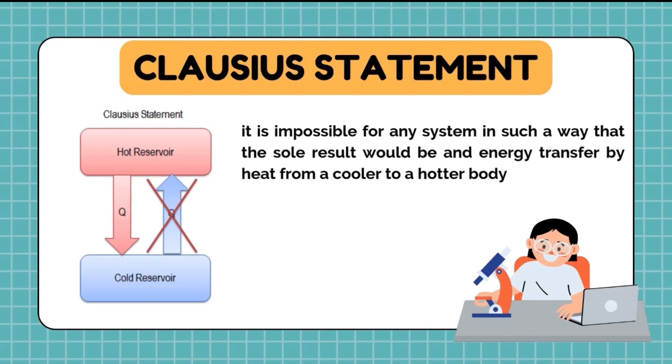First, the Clausius statement. It is impossible for any system to operate in such a way that the sole result would be an energy transfer by heat from a cooler to a hotter body. Second is the Kelvin-Planck statement. It is impossible for any system to operate in a thermodynamic cycle and deliver a net amount of energy by work to its surroundings while receiving energy by heat transfer from a single reservoir.

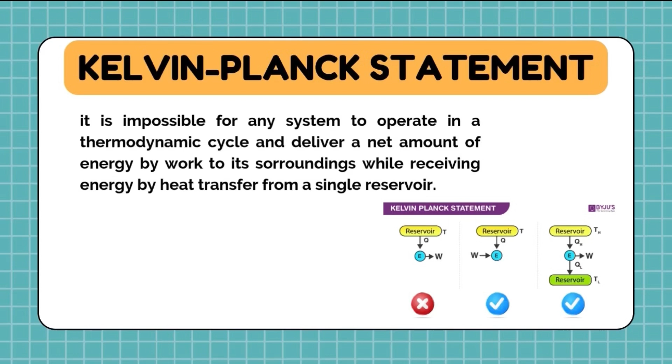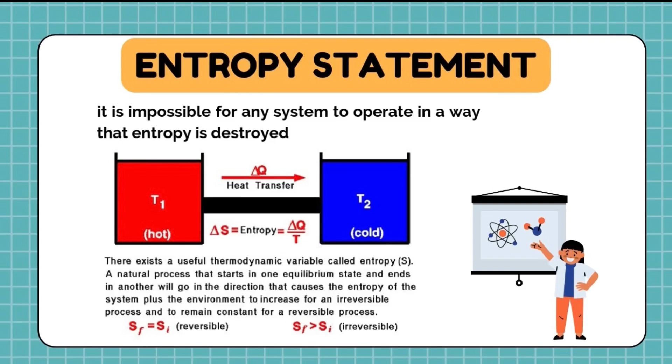The third statement is the entropy statement. It is impossible for any system to operate in a way that entropy is destroyed. So to make it easier, we make two easier statements that would help us more in understanding this law. So first, let's call this high to low. For any process, a natural flow will always be from higher energy value to lower energy value.

For example, coffee: the temperature of coffee is higher than its cup. And as it says, from higher energy value, the heat of the coffee gets transferred to the cup, which is cooler, lower energy value. And that's why the cup gets hotter.

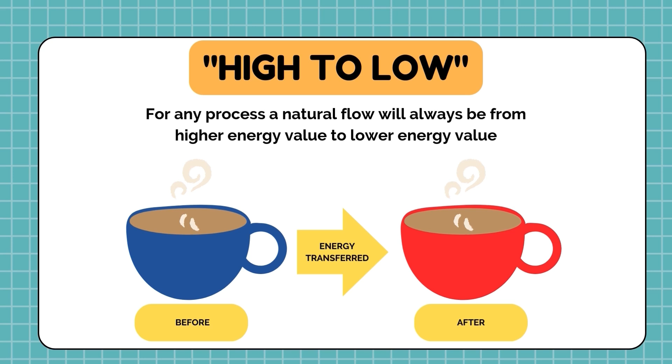So now, let's move to the second one. Let's call this perfect is impossible. For every real world process, there will always be losses. That means you cannot convert all of your car fuel into mechanical energy which can rotate your car wheel. Proof is the gases you see from the car muffler.

Or try bouncing a ball by throwing it up into the air. See that as the number of bounces increases, the height of the bounce decreases because of the loss of energy which is transferred to the ground. So that's it. I hope this made it easier for you. Before we jump to the next subtopic, I would like to note that the second law of thermodynamics is a law and it is applicable to everything in our world.

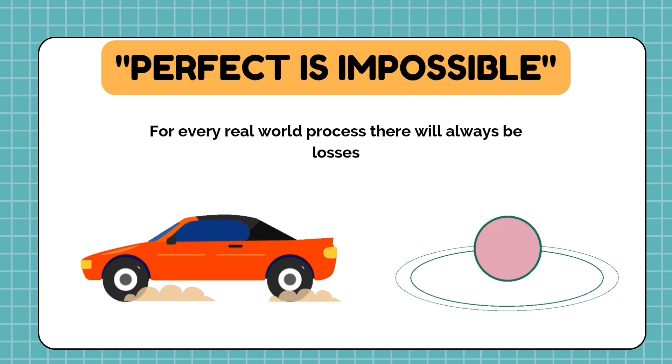So next, I will explain to you guys about thermal energy reservoirs. Thermal energy reservoir? What is it? Well, a thermal energy reservoir is simply a humongous mass, and so it can store a whole bunch of thermal energy. Because remember, thermal energy capacity is equal to mass times specific heat. So when we talk about a reservoir, we talk about something that can absorb a bunch of energy and still not change in temperature. Like, think about the ocean.

If I pour my hot coffee in the ocean, it's not going to change temperature. Well, if it does, it's going to be so small that I won't even be able to see it. It will be very, very tiny, and so I can say effectively that the temperature of my ocean is constant. And that also means if I'm taking energy from the ocean, I can say it's at a constant temperature. And why do I care about this?

It makes my equations a lot simpler. I don't have to worry about doing a whole bunch of integrals, because the temperature changing as I pull heat out is going to change a lot of our equations. We want things to be constant. So when we talk about energy being moved from one place to another, or energy coming in, we are talking about it coming from a reservoir. So it's always constant temperature. The amount of heat that can come from it can be constant too.

So in real life, thermal energy reservoirs that we use are oceans, rivers, lakes. A nuclear power plant may not have an actual lake that they are pouring into, but they have some man-made lakes around them that they use to dump the heat into. And the same for coal power plants: some power plants are right next to a river, and when they are breathing out smoke and producing power, they are dumping that hot water into the river. Fish don't like that, so if we can minimize the waste heat, it is a good thing for us to do.

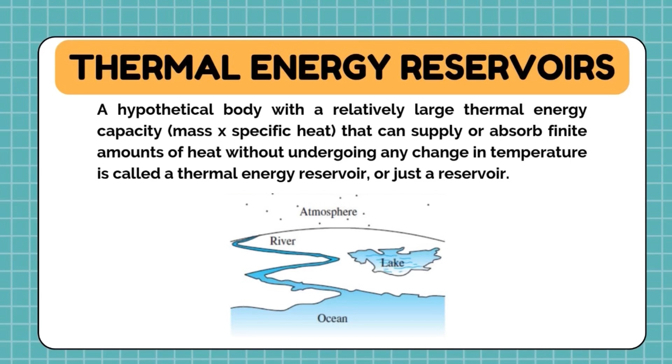And finally, the ocean is the biggest one for us. It's taking the brunt of global warming because the extra heat in our atmosphere gets absorbed into the ocean. Apparently it's like several nuclear bombs a second of energy being put into the ocean every single day. And the reason it doesn't change in temperature that quickly is because it is such a humongous mass.

Okay, next, two things here: thermal energy sources and thermal energy sinks. So reservoirs can be those big things. If I'm taking energy from it, it is a source. And if I'm giving energy to it, it's a sink. So for all of our problems, we are going to be thinking about these sources and sinks.

You'll see there are magical little bubbles. They are not magical bubbles, they are real things. It's just, if I'm not caring about them, if I just know that heat is coming from them or going to them, then I don't need to talk about their properties. Like, yes, thermal energy sinks are usually the atmosphere. Not always, it just depends on what you are doing.

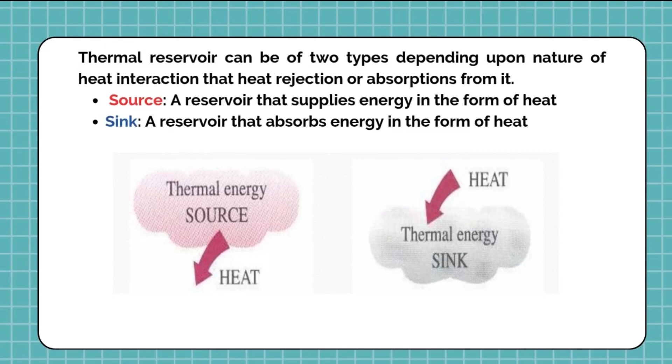Thermal energy sources are a lot of the time combustion. As we go forward, we'll be running into those more, talking about combustion, talking about the atmosphere, talking about our effects on it. But for now, just know that we can say red bubble, grey bubble: one is a source, one is a sink. One gives me heat, one takes the extra heat away.

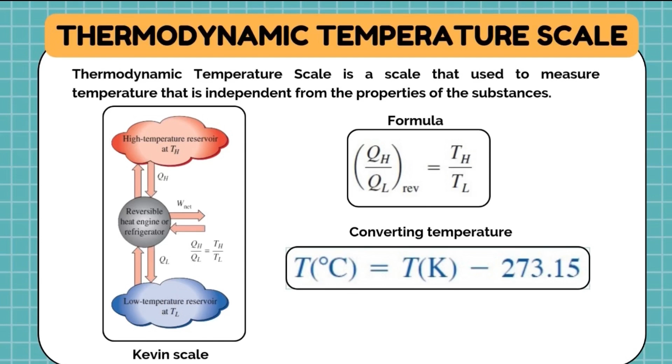For the Kelvin scale, its unit is Kelvin. So to convert from Kelvin to Celsius, we take Kelvin minus 273.15. And to convert from Celsius to Kelvin, you just add 273.15 to your temperature in Celsius.

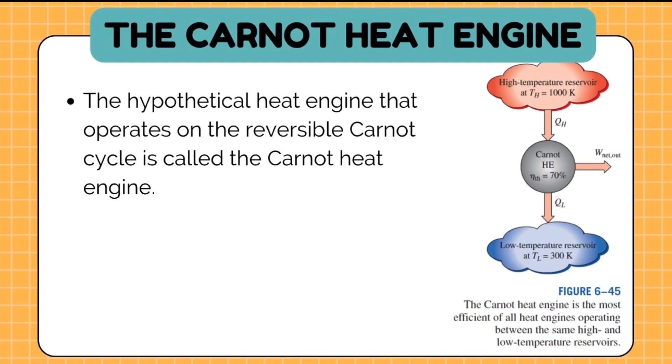Now I'm going to talk about the Carnot heat engine. The Carnot heat engine is a hypothetical heat engine that operates on the reversible Carnot cycle. Now, let's look at Carnot efficiency. For any heat engine, the thermal efficiency is equal to 1 minus QL over QH, where QL is the heat of the low temperature reservoir and QH is the heat of the high temperature reservoir.

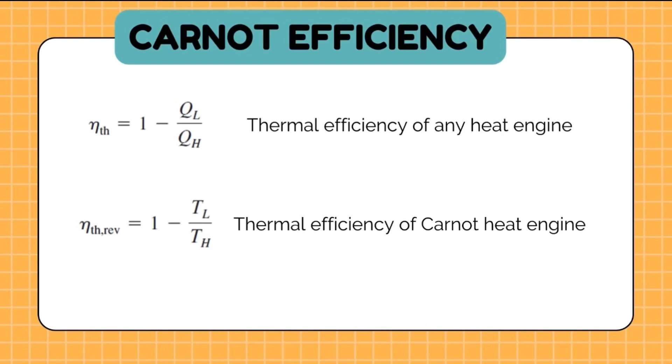But for the Carnot heat engine, the thermal efficiency is 1 minus TL over TH, where TL is the temperature of the low temperature reservoir and TH is the temperature of the high temperature reservoir, both in Kelvin. When the thermal efficiency is less than the Carnot efficiency, it's an irreversible heat engine. When they are equal, it's a reversible heat engine. And when the thermal efficiency is more than the Carnot efficiency, it's an impossible heat engine, because a heat engine cannot have more efficiency than the Carnot efficiency.

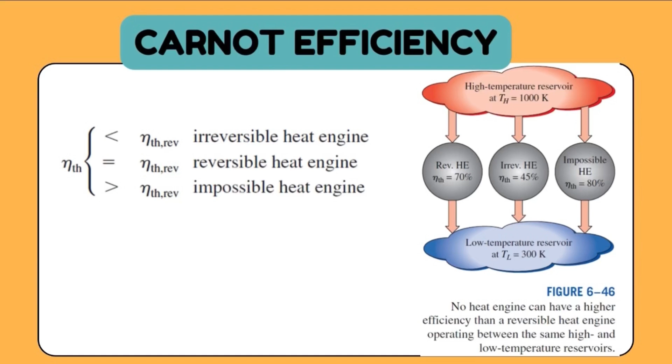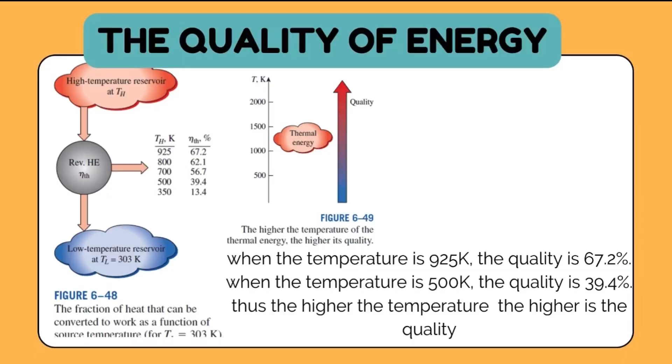Now, let's go to question 1. A Carnot heat engine operates with a source at 1000 Kelvin and a sink at 300 Kelvin. If the heat engine is supplied with heat at a rate of 800 kJ per minute, determine A, the thermal efficiency, and B, the power output of this heat engine. Now, the solution. TH is 1000 Kelvin and TL is 300 Kelvin. The heat is 800 kJ per minute. We convert the minute, and we get 13.33 kJ per second.

For A, the η th,rev is equal to 1 minus TL over TH. Substituting TL and TH, we get 1 minus 300 over 1000, which is 1 minus 0.3, equal to 0.7, so η th,rev is 70%. For B, the power is equal to η th,rev times Q. So we get 0.7 times 13.33 kJ per second, which gives 9.33 kilowatts.

Question 2 states that a Carnot heat engine receives 650 kJ of heat from a source of unknown temperature and rejects 250 kJ of it to a sink at 24 Celsius. Determine the temperature of the source and the thermal efficiency of the heat engine. From that statement, QH is 650 kJ and QL is 250 kJ, and TL is given in Celsius, so we convert it to Kelvin, which is 297.15 Kelvin.

To find TH, we use the formula QH over QL equal to TH over TL, substitute the given values, and get 772.59 Kelvin, or 499.44 Celsius. For the thermal efficiency, we use η equal to 1 minus TL over TH, substitute the values, and get 0.6153, or 61.53% efficiency.